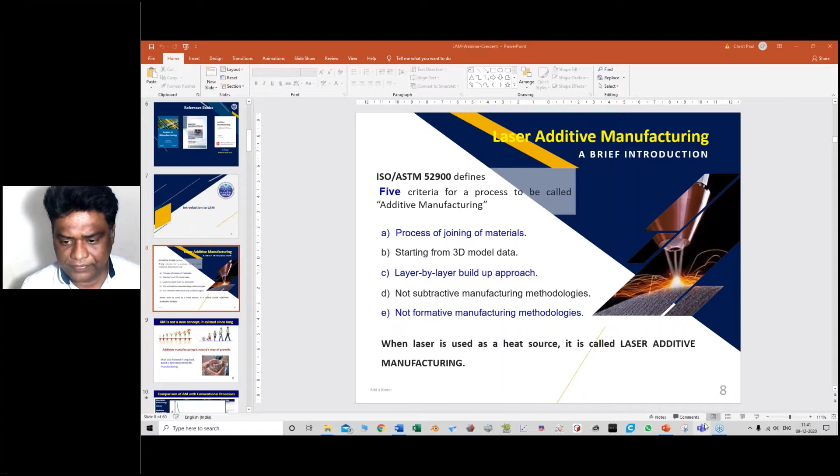This slide shows the 5 points defining the criteria for a process to be called additive manufacturing. So this is where we stopped. We have to understand these 5 criteria: process of joining material, starting with the 3D model, layer by layer, non-subtractive, non-formative.

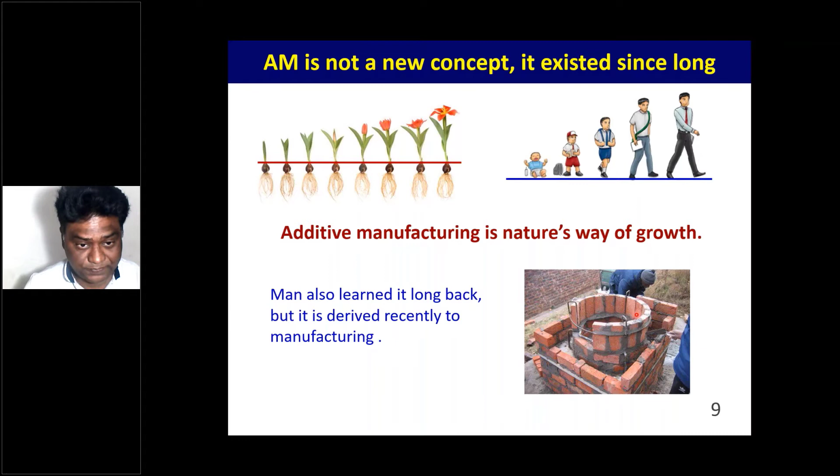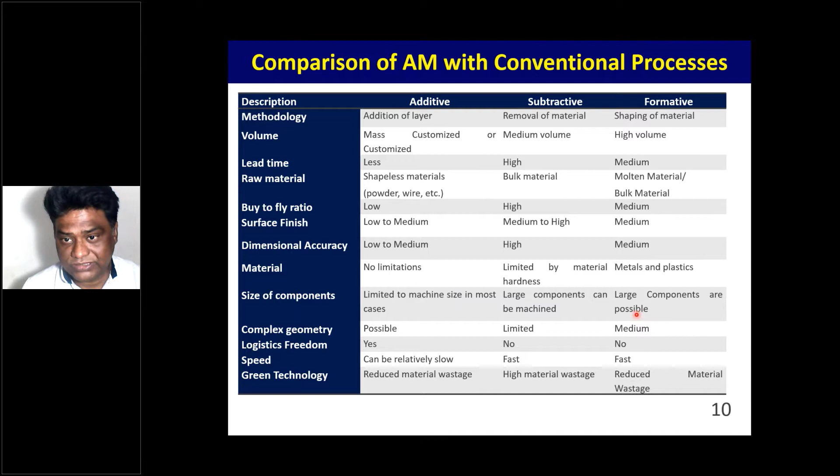Now let's have a quick comparison of additive manufacturing with subtractive and formative technology. In terms of dimensional accuracy, additive manufacturing gives low to medium, subtractive gives very high, and formative gives medium. So this is an area where additive manufacturing is not very attractive. The same goes for surface finish - these are areas where today additive manufacturing is not very attractive.

Now, if you see the material aspect, there is no limitation because we use lasers that can melt any material. So there's no limitation in additive manufacturing, whereas subtractive is limited by the hardness of the material, and formative is used only for metals and plastics - you can't form ceramics with it. So that is the limitation.

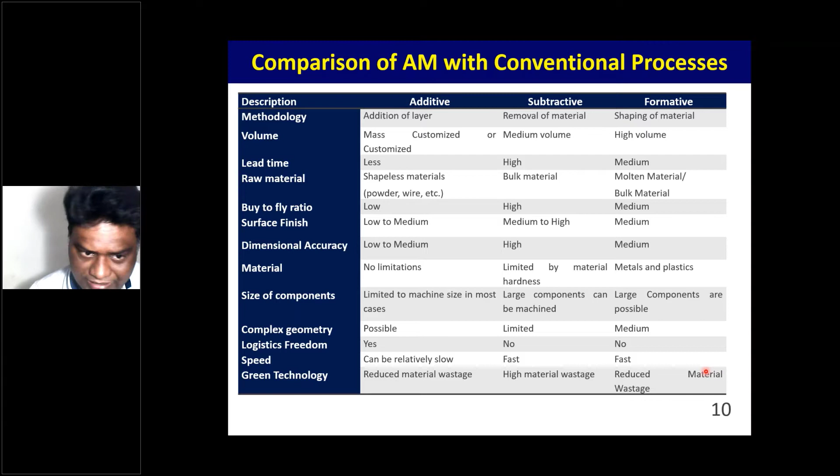So the major gain we get is in terms of material and shapes. The most important part is that it's a greener technology because it uses reduced material wastage, whereas subtractive has a lot of material wastage, and formative is another story. So these are the points where additive manufacturing, whether good or bad, is taking specific spaces.

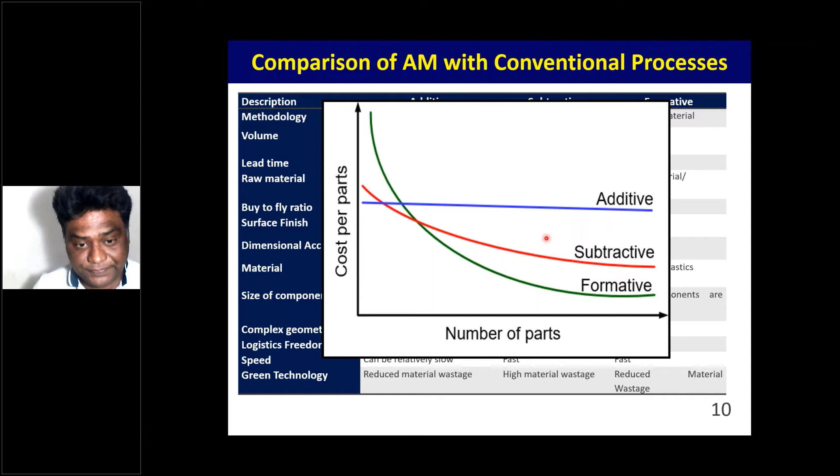So when I'm talking of additive manufacturing, I'm talking of laser additive manufacturing and saying this is great and big. Let's try to understand the commercial angle of it, how important these things are in terms of technological or techno-commercial aspects. Today industries are challenged in different ways. There is a cutthroat competition.

Let's take the example of cars. Some two decades back, we had only two manufacturers, Fiat and Ambassador, and nobody else. So though the market was smaller, the companies were assured about the business, and they knew that even if they were doing not very good, they could survive for long. On the other way, the customer was not very demanding. He thought this is part of it, and people used to live with it.

But what happened today? Talk of the car sector itself - we have many players: Honda, Hyundai, MG, Suzuki, so many players. So the market has gone up, it's increased, the volume has gone up. Even Indian manufacturers, Mahindra is there, now Kia is coming in, and we have Nissan too. Every manufacturer is catering to different segments by providing different models - hatchback, SUV, small cars, luxury cars. So everybody is giving everywhere.

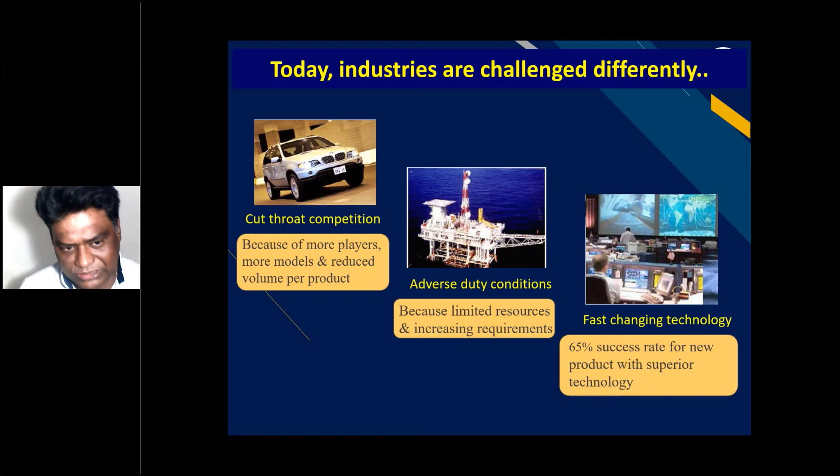Now let's try to understand. We talk so much about commerce, about industry requirements, about customer requirements. How does it affect, how does it help in terms of manufacturing? Let's see how conventional manufacturing works.

The conventional manufacturing normally starts with a design. So we have a synthesis part, analysis, then documentation and drawing. Then we plan the product, how to do it, whether it has to be sent for fabrication, to the welding shop, or machining centers. Shall we go for a lathe, a milling machine, or some forming tool?

So this planning has to be done. Then we procure the raw materials, then we procure the tools. We do the CNC programming in manufacturing, then we go for quality control, packing, and usage. So this is a typical cycle one can have for making a product.

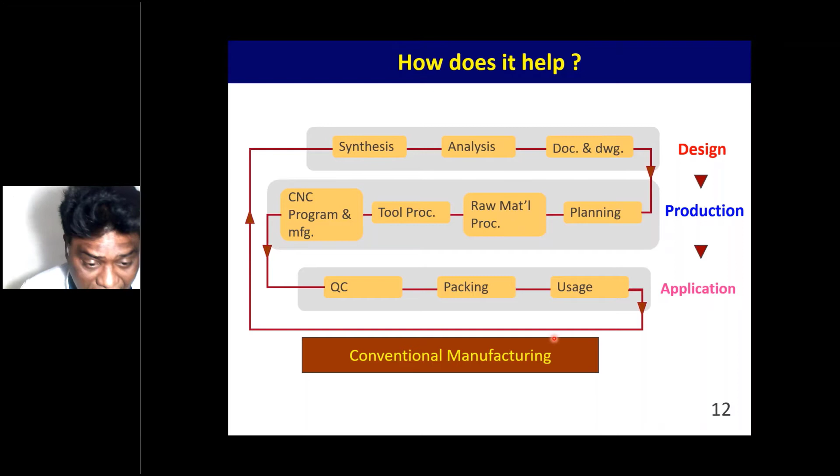With the advent of additive manufacturing, I can say these steps are not at all required. For example, documentation and drawing - now in additive manufacturing you start with the 3D model, so you don't need documentation and drawing. Whatever the model is, there are softwares that will convert that information the way they want. So we have a lot of saving, and even these steps may be required maybe 10% or 15%. The rest of the things are not required.

And in additive manufacturing, all the planning is on the machine, by softwares and computers. So no separate planning is required.

When talking of raw material procurement, the designer need not wait for completing the design to initiate the procurement procedure. For example, the purchase fellow, the moment you think you want to develop this component, he knows what will be the basic material since we are using shapeless material. So he knows what material we are going to have, and he will not wait for the design to be complete. As far as the volume of the product is within the range of the machine, you can go ahead and procure the materials immediately.

For example, you want to make a piston block. You know it will be of so grade of aluminum or so grade of cast iron. Right away you can procure the shapeless material and do it. If you do this for a conventional material, unless the product is finalized and the design is frozen, you cannot initiate procurement, because the size is the limitation.

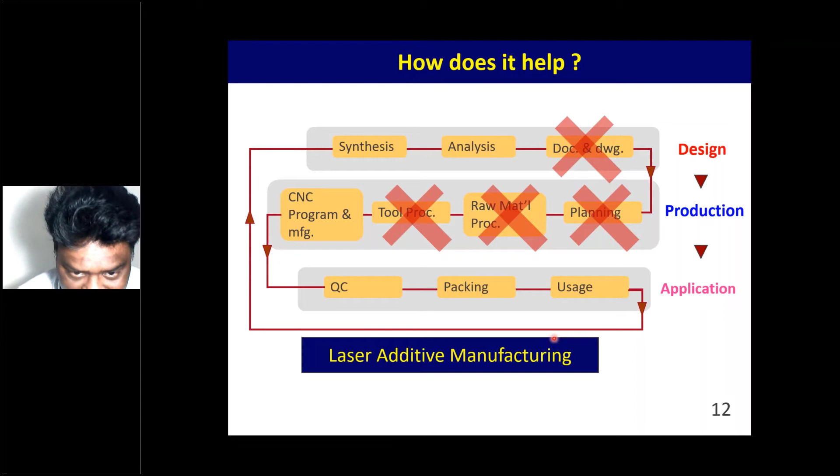In case of additive manufacturing, we don't need a specific tool because whatever is in the machine is done. Maybe for post-processing you may go for something to encounter today's limitations, but in general you don't need any tool procurement. So these are the things which make the scenario very much different.

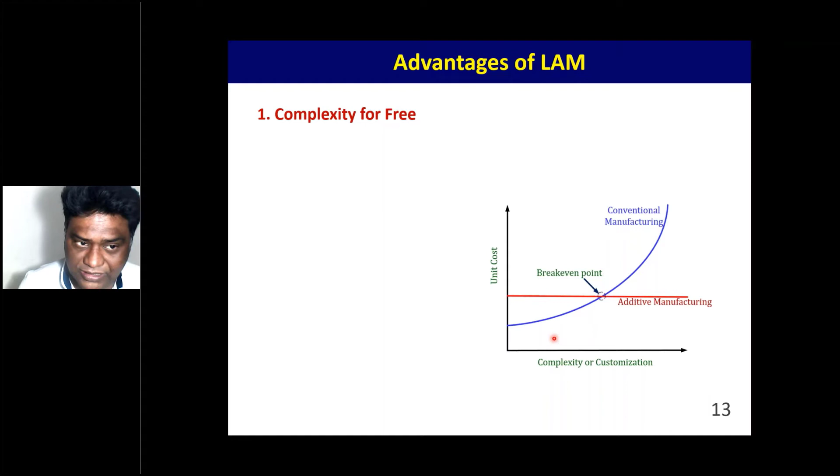So if we try to combine these technologies into the advantages of laser additive manufacturing: the first thing is it provides complexity for free, because whenever the 3D object is sliced into 2D, a lot of complexity is resolved. In terms of part fixturing, with laser additive manufacturing we are going with non-contact tools - there are no cutting forces, no forming loads, so things are simple.

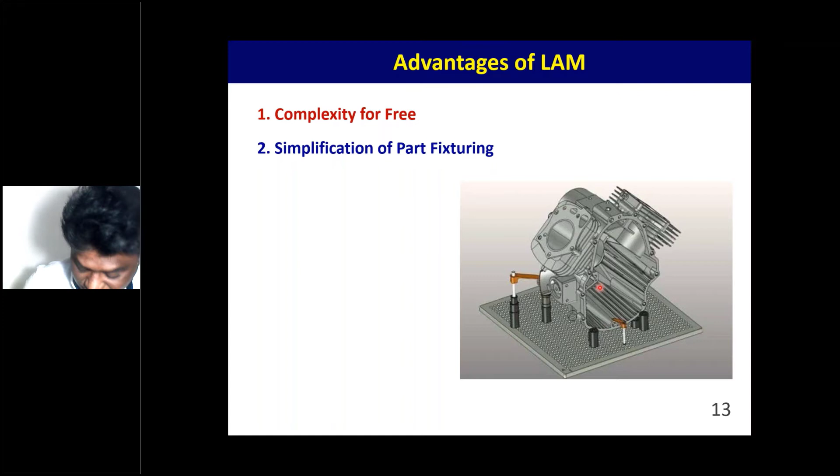Simplification is another advantage. You can go for mass customization - if somebody wants some specification at some other location, it's possible because you are making one by one.

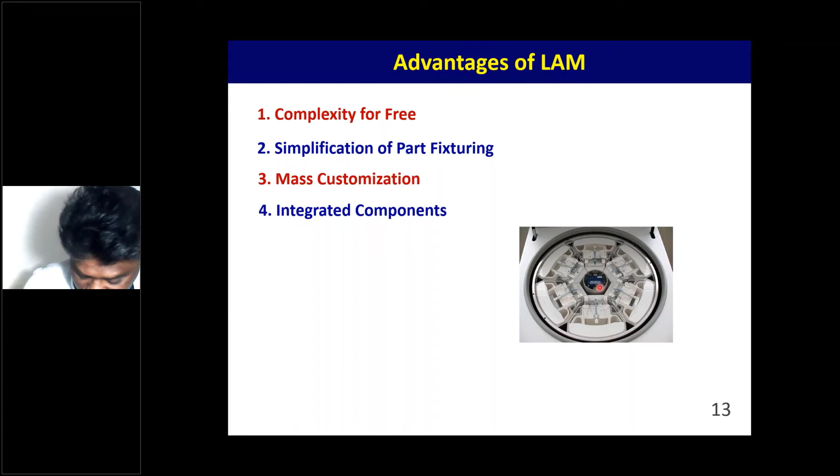Another aspect is you can think of integrating or embedding sensors within the component, which is not otherwise possible. For example, you can think of embedding cooling or thermocouples at different locations so you can have instant information of temperature at that location. You need not do a lot of things for that, and it can be embedded within the deposit itself.

Another aspect is material design freedom. With material design freedom, you can decide how you want to proceed ahead, how to decide feature-based design and manufacturing into it.

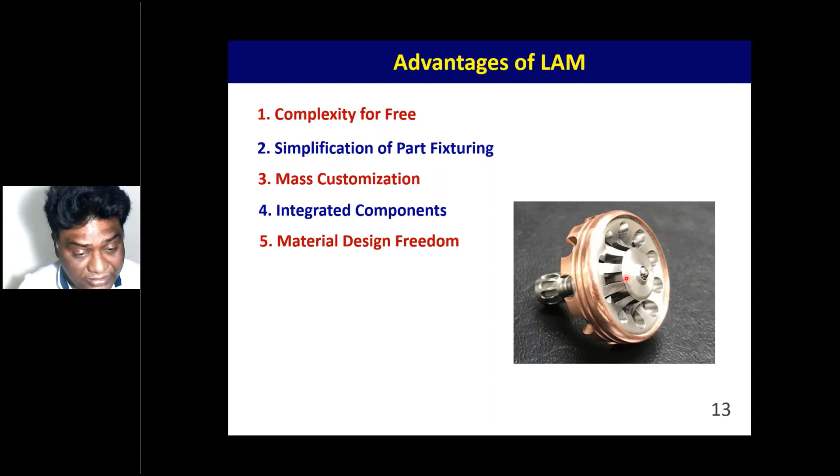When I talk about feature-based design and manufacturing, it means you want better conductivity, you can use copper. When you want strength, you can use stainless steel or any other structural material. So the idea is you can bring material design freedom in such a way that makes things very different, and you can plan. If you want a harder material or a variation material, you can deposit it locally, and the rest of the material can be other, which this freedom allows.

Another aspect is logistic freedom. Here, we have design freedom because this technology is Industry 4.0 compliant. So you can always send the design and take the help of experts. You can push things to different locations. So you need not worry about a lot of things, and there's a lot of logistic freedom available for people.

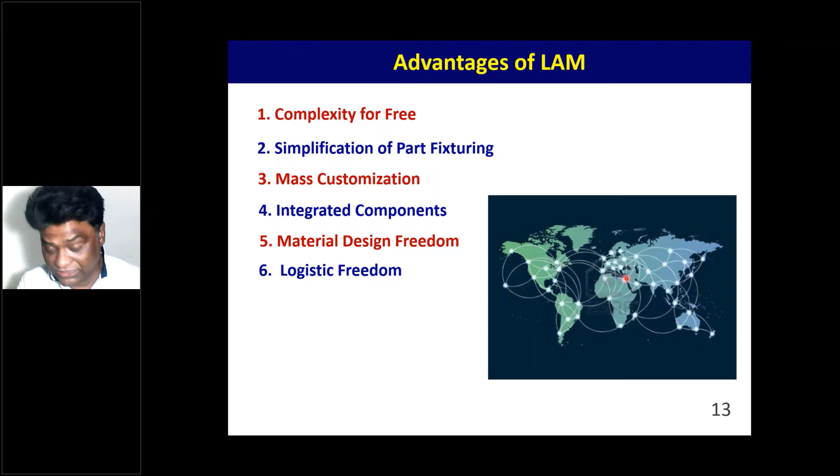Since you can put the parts together in a very nice way, there is a lot of saving, so basically it's also reduced time in terms of design, cost and cycle. That sort of arrangement is not possible to make using conventional manufacturing technology.

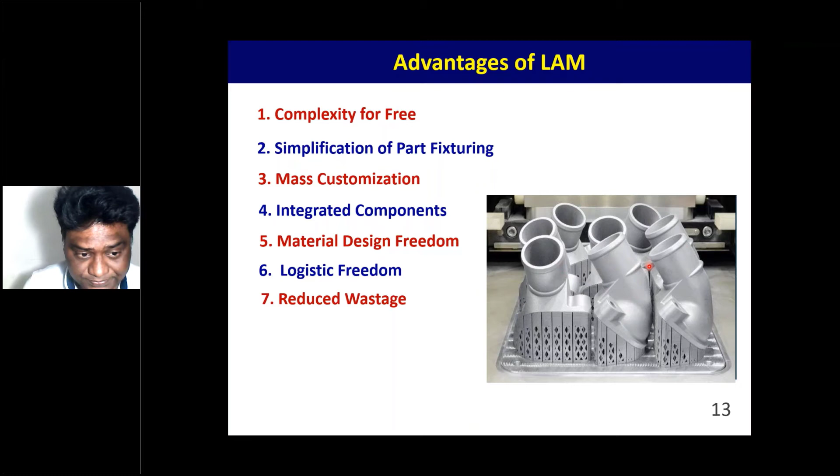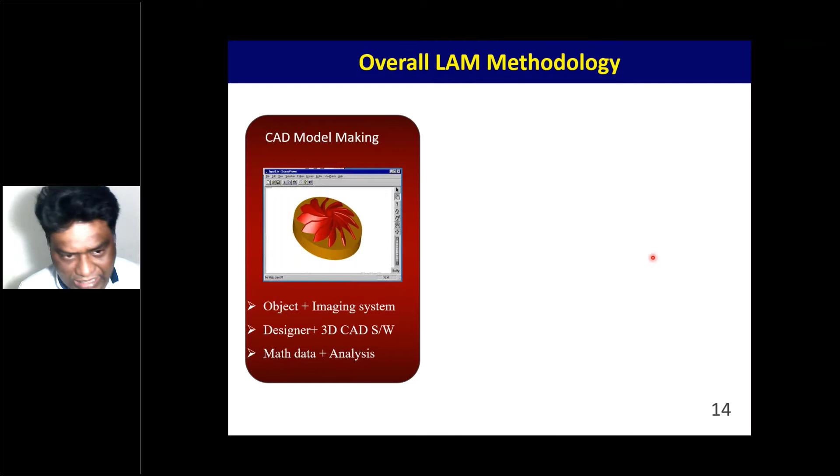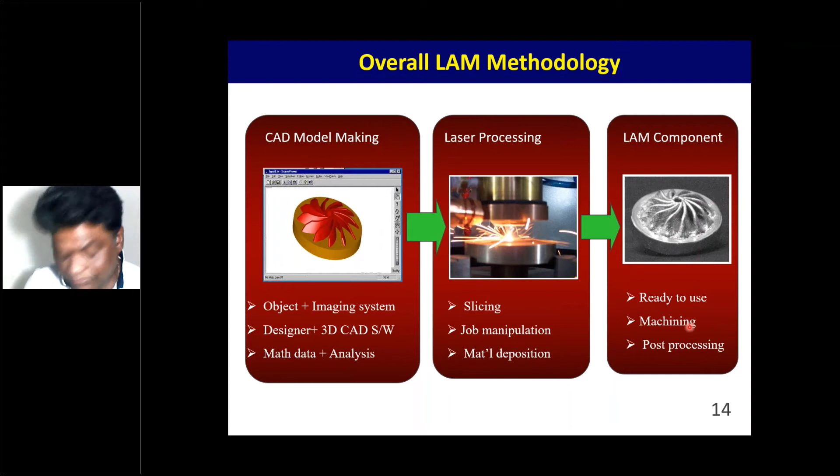Now we'll slice it, do the job manipulation, and do the layer by layer material deposition, and finally you may get this result output. So we are starting with this, doing a lot of things, and this is the output. This can be a ready-to-use material, or if the dimension requirement is not met, we may go for some machining. If the material requirement is not met, we can think of going for post processing. So this is the big picture about the LAM methodology.

Classification, I will not go into detail because some of you must already know. But again, we have to quickly understand there are two technologies: one is powder bed fusion, another is directed energy deposition. In powder bed fusion, you have sintering and melting, and here you have powder feeding and wire feeding. In powder feeding you feed the powder, and in wire feeding you feed the wire as a raw material during the deposition.

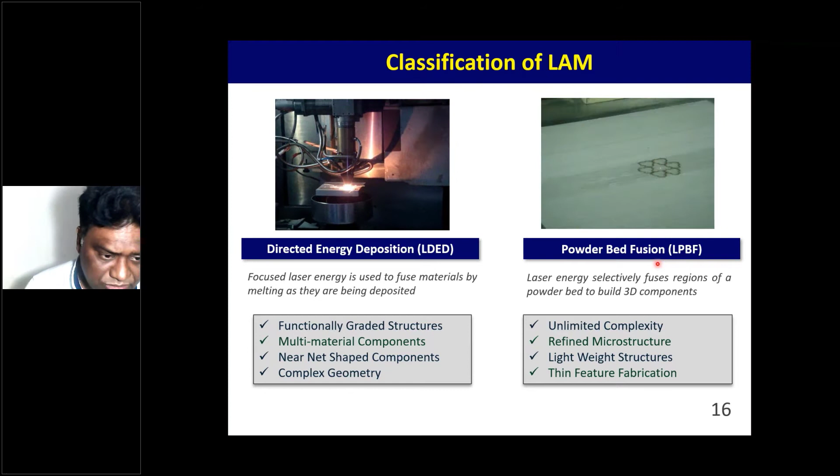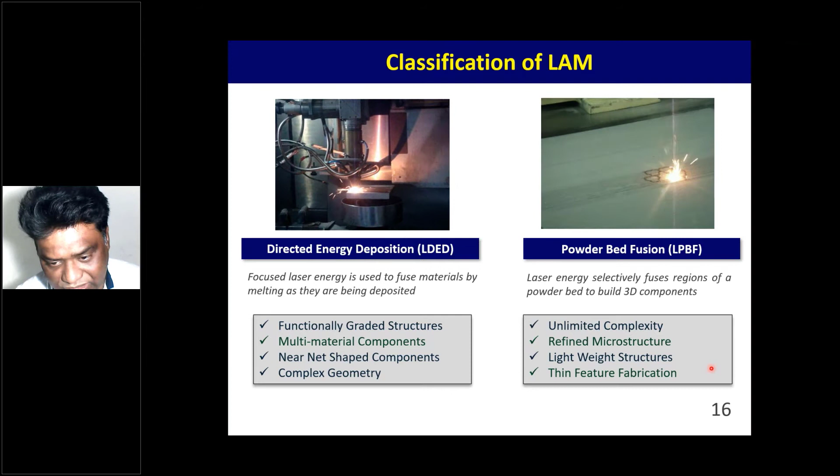This is about the classification, and you are seeing some small videos I have inserted in my slides, so that you can have a feel of what we have developed. These are our machines; we have developed both machines at RRCAT, the directed energy deposition machine as well as the powder bed fusion machine. The directed energy deposition machine can be used for making functionally graded materials and multi-material components. The shape can be near-net shape because dimensional accuracy is a bit of an issue here, but you can think of making complex structures and complex geometries. In the powder bed fusion machine, it's very good as far as complexity is concerned. The deposition rate and scanning rate are very high, resulting in refined microstructures. You can think of making lightweight structures or thin feature fabrication using powder bed fusion. So this is a quick comparison of the technologies we have developed and are working with.

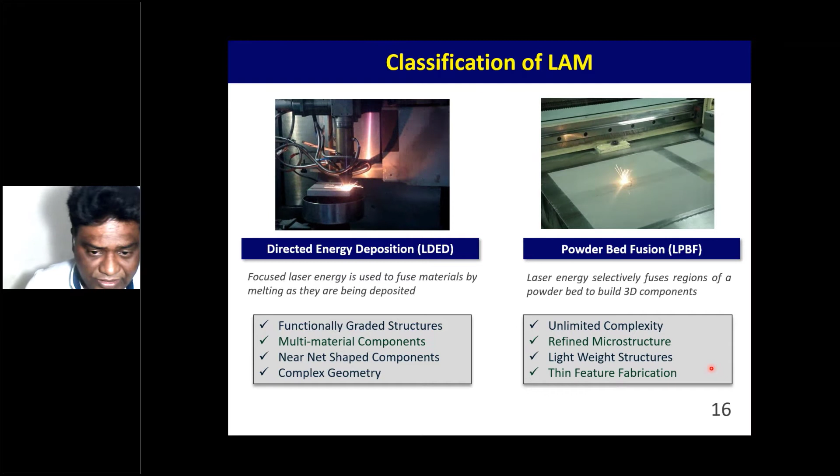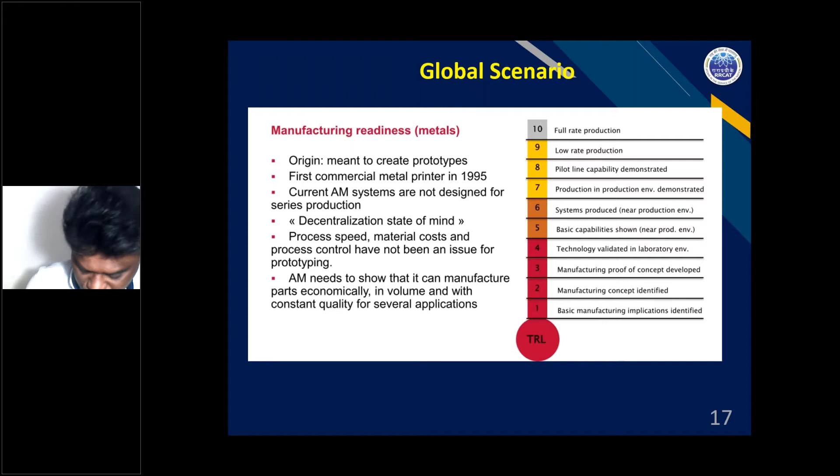Now the second point is the technology. There are two technologies, powder bed fusion and directed energy deposition. So what is the global scenario of this technology? Everywhere we talk of technology readiness level, which can be 1 to 10. This is the present status of technology in aviation and automobile, where we are somewhere at 5 to 6. In tooling, space, and drone defense, we are somewhere at 7, 8, 9. And in dental, instrumentation, implants, and artistic applications, we are already at 10. So this is the present status of laser manufacturing globally.

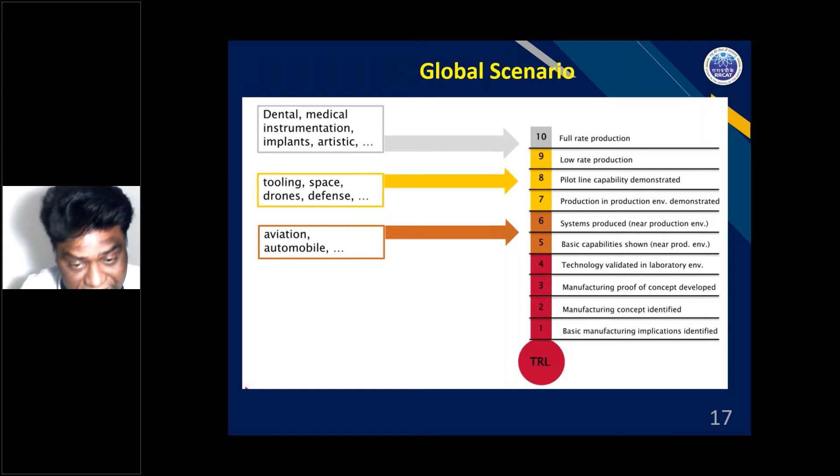Now, what is the condition in India? In India, industries are yet to take up metal additive manufacturing in a big way. Most people are focused on plastic additive manufacturing. There are some academic institutions now joining laser additive manufacturing in India. So this is the state of how things are going.

Now, the second question is, who has these machines in the country? Definitely, RRCAT Indore has indigenously developed machines.

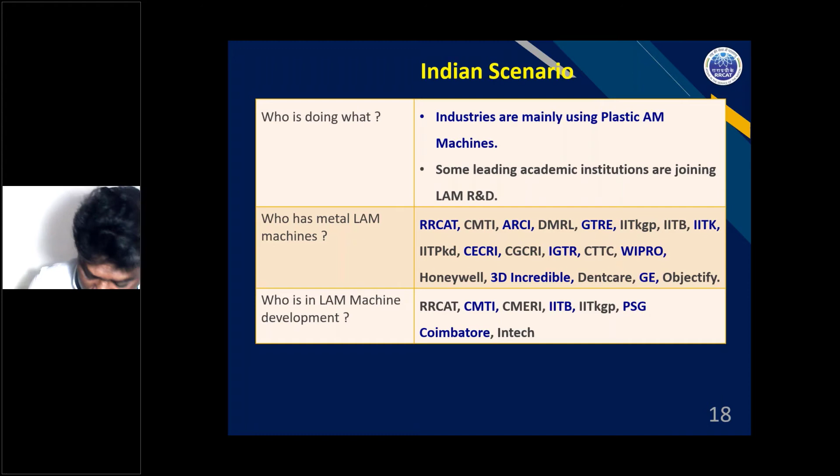Now another part is who are working in the development of machines. So we have a couple of labs and institutes like RRCAT, CMTI, CMERI, IIT Bombay, IIT Kharagpur, PSG College Coimbatore. They are working on the development of machines.

In fact, DMLS is also working in this area. So this was the Indian scenario, and now we'll push on to what we are doing at RRCAT. In RRCAT, we initiated this program somewhere in 2003 with my PhD, and then we moved ahead. Initially our systems were CO2 laser based, and we moved to fiber laser based machines. A lot of things have been done, and we'll be showing you some of the glimpses.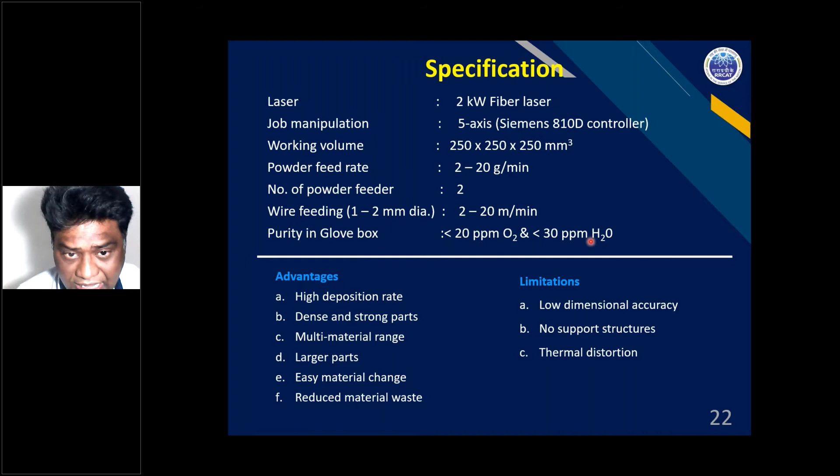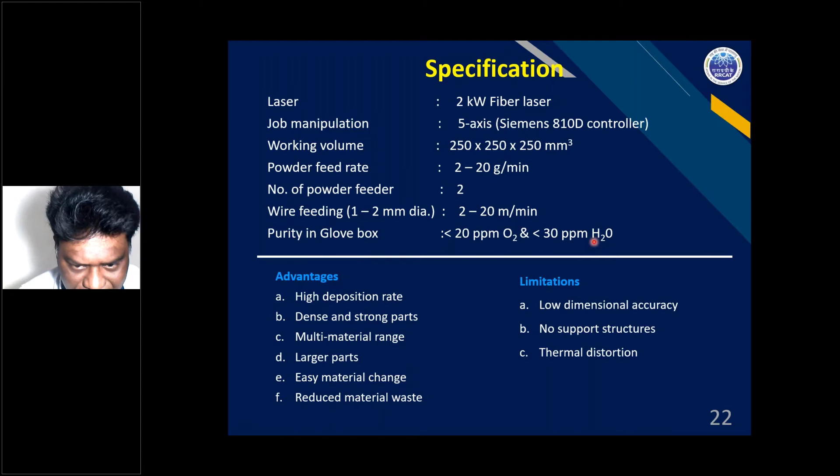The specification of this machine is you can go for 2 to 20 grams per minute of deposition. wire feed can be 2 to 20 meters per minute. This has a build volume of 250 by 250 by 250. Any metals can be tried out because we have a very nice glove box, which can give us oxygen level better than 20 ppm and moisture level better than 30 ppm. So this is the machine.

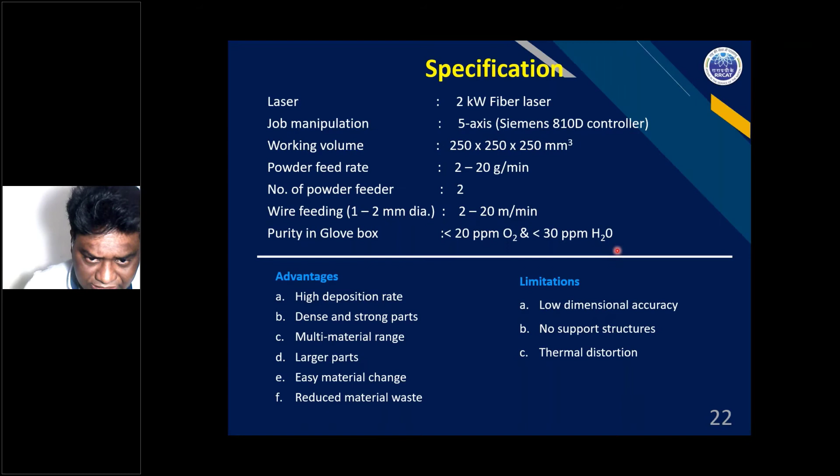Another machine that we built is the powder bed fusion machine. One thing I'll mention before I go to the second machine: if we compare this machine to the commercially built machine, the commercial machine will cost in the range of 5 to 7.5 crores. The projected cost of our machine is somewhere around 2 to 2.5 crores. So what I'm saying is, they're likely to have a 2 to 3 times saving in terms of import substitution. So this is the machine we built.

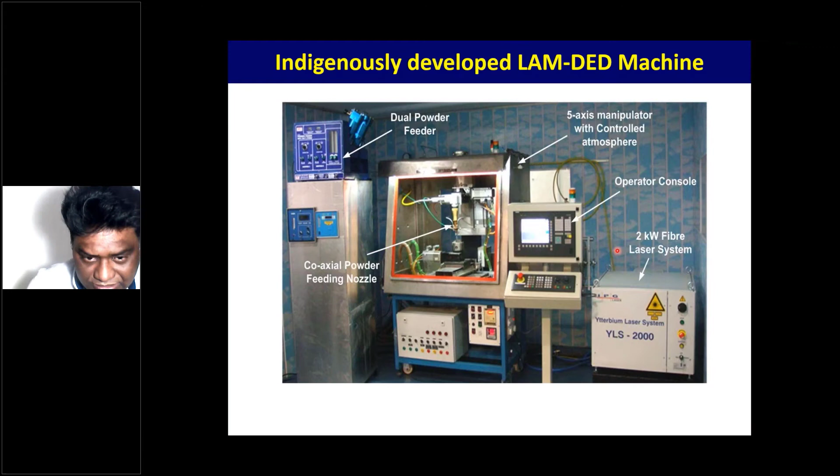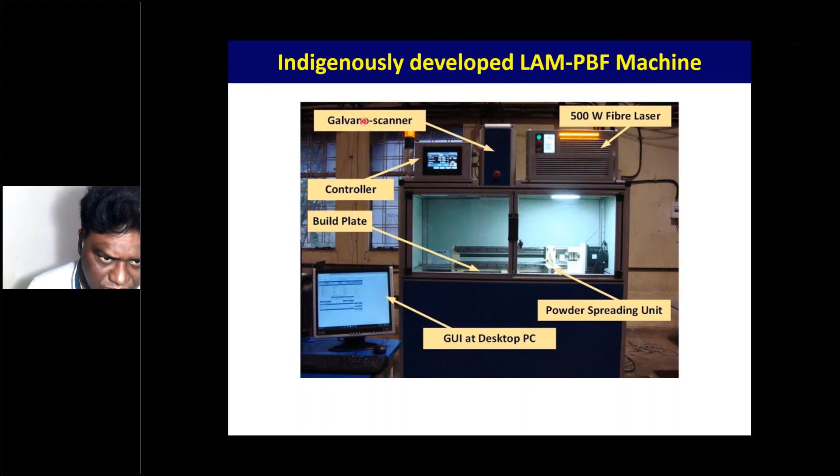The other machine we developed is a 500 watt fiber laser based powder bed fusion machine. In this machine we are using a 500 watt fiber laser. You have a powder spreader, controller, galvano scanner, and build plate. All these things are done, and this particular machine also has a build volume of 250 by 250 by 250 millimeters. We are doing a lot of things with these two machines.

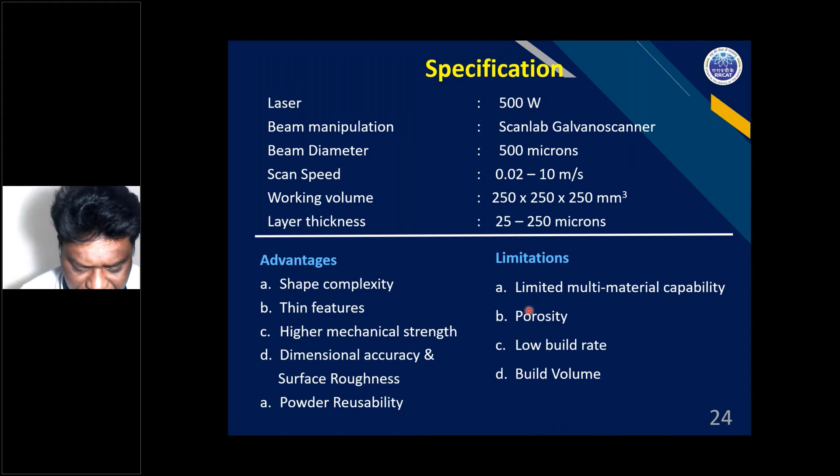The commercial cost of this machine may be somewhere around 3.5 to 5 crores. The machine that we built may cost somewhere about 90 lakhs to 1.5 crores. So this is again a different ball game and different program that we have come up with, trying to push things to the next level of excellence.

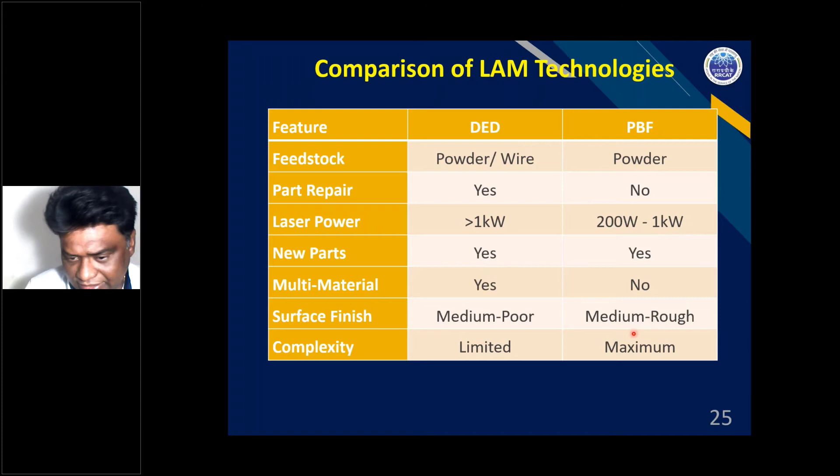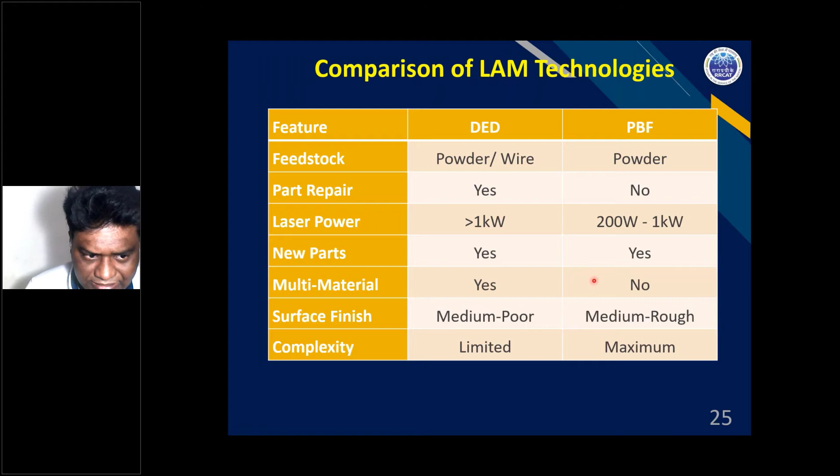Now, if you compare these two technologies, direct energy deposition and powder bed fusion, you'll find that direct energy deposition is very good when it comes to part repair, and when it comes to making multi-material parts, it takes the lead compared to powder bed fusion. But when it comes to handling the most complex components, powder bed fusion comes out better, and in terms of surface finish, it scores well. So these are the quick comparisons of these two technologies.

What are the processes we are doing at RRCAT? Another thing I'm going to share with you. Before we go into that, I'll try to share how the technologies are assimilated by the people working with us, and what our observations are on how things have changed.

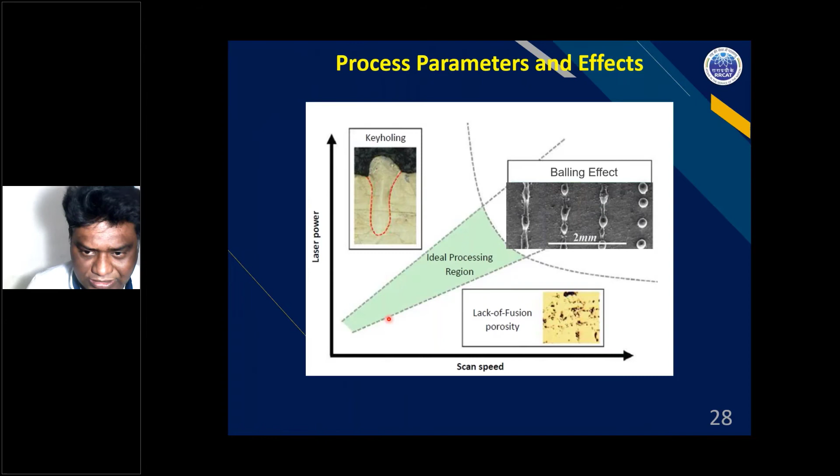So what I want to say is, just to demonstrate, it's a very simple concept to make a porous structure. Either you can use such balls, or you can make curvatures like this. As a result, you can make the porous structure, which is not possible conventionally to generate such things.

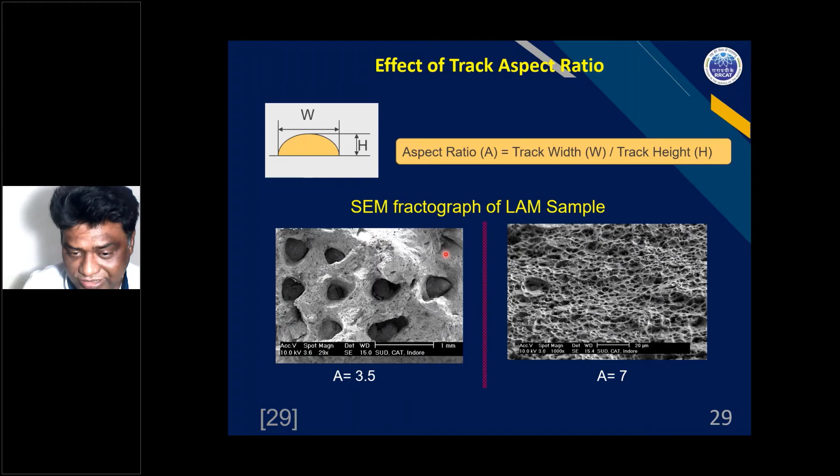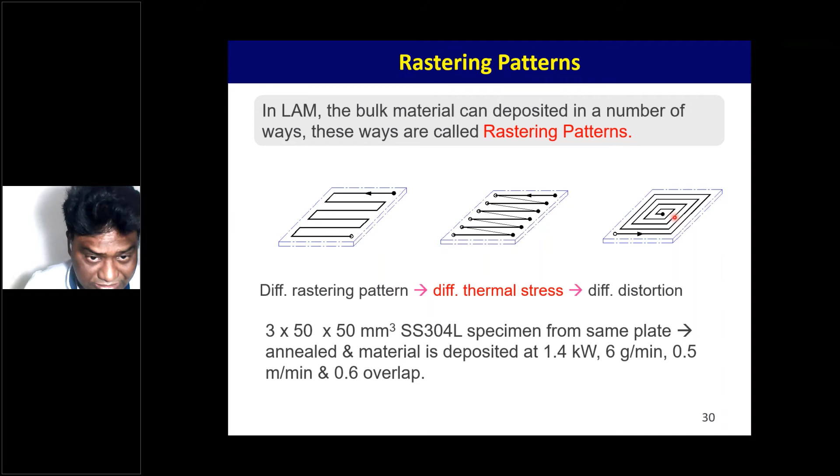Now, when you have to make a component of larger size, suppose you want to make a cubical structure, you want to fill a square at every point, so you can have a number of ways of filling this. What you have to understand, in case of metals, these scanning and rastering patterns are going to give a different thermal stress and different distortion. So this is important, and we have studied the 4 patterns and tried to understand how these are changing the scenario in terms of distortion.

So this is the S pattern, because it forms the S continuously. Laser is switching on, going this way, then going this way, and then doing this. Another we have is the Z pattern, where you are going from here, switching off the laser, coming back, and then starting again. That is Z pattern. And you can also think of filling the area with a spiral in or spiral out. All these 4 will give different shapes.

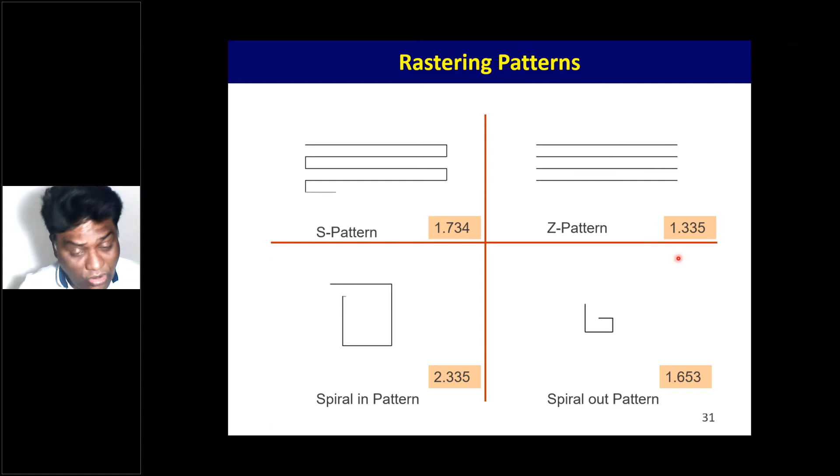You see, this is the way it works for the S pattern. This is the way it works for the Z pattern. This is the way it works for spiral in, and this is for spiral out.

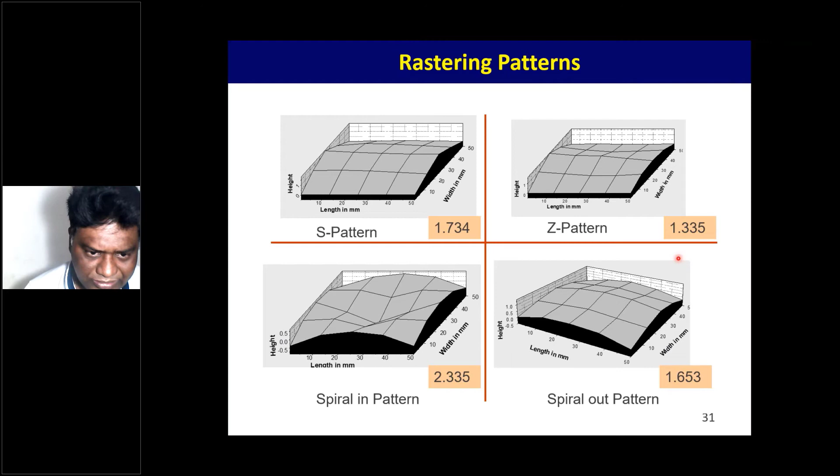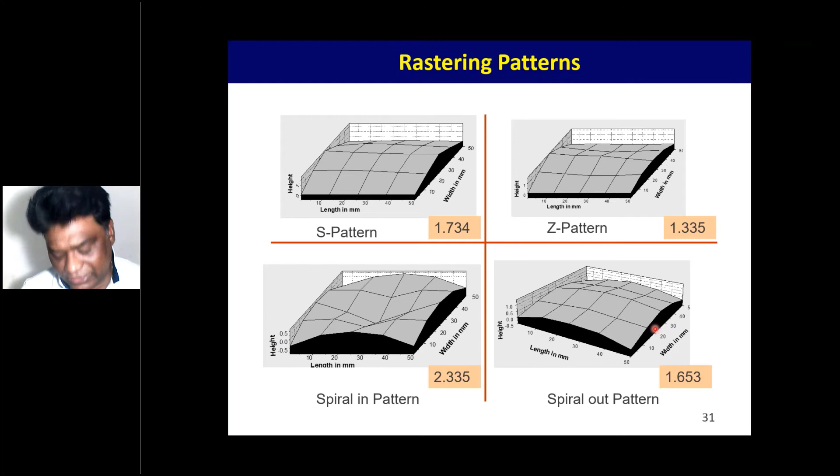Another way of resolving this problem can be, you can do the meandering. You can just move like this, and every layer can be rotated by 67 degrees. First layer you are depositing, then turning it to 67 and depositing another layer like this. Similarly, you can think of making stripes to cover larger areas so that the preheating effect can be managed.

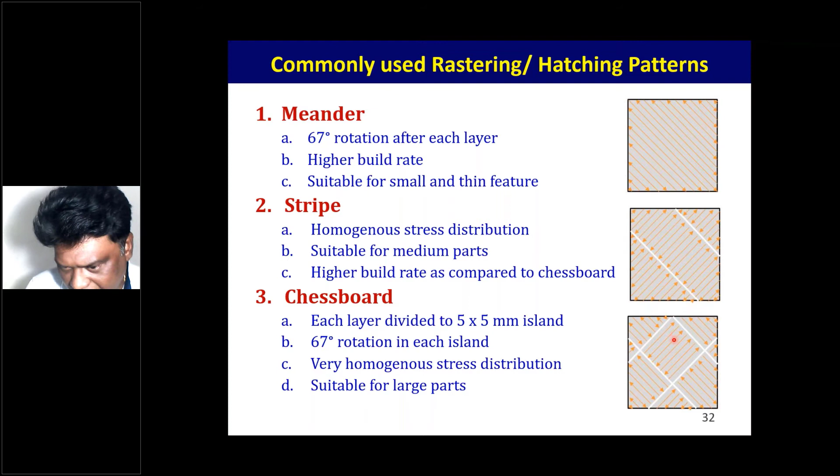Another way, you can have a chessboard. You can make 5 mm by 5 mm islands, and then just go on depositing the material across this. After every layer, the next layer will be rotated. Everything like this square will be rotated by 67 degrees. So that sort of thing people try, and 67 is really a magic number. That works wonderfully for many applications to control the residual stress, to bring things in a very big way.

When we talk of these, we have a lot of things to consider as a design consideration. We talk about the feature size, surface finish, part orientation, lateral holes, overhang structure, and residual stresses.

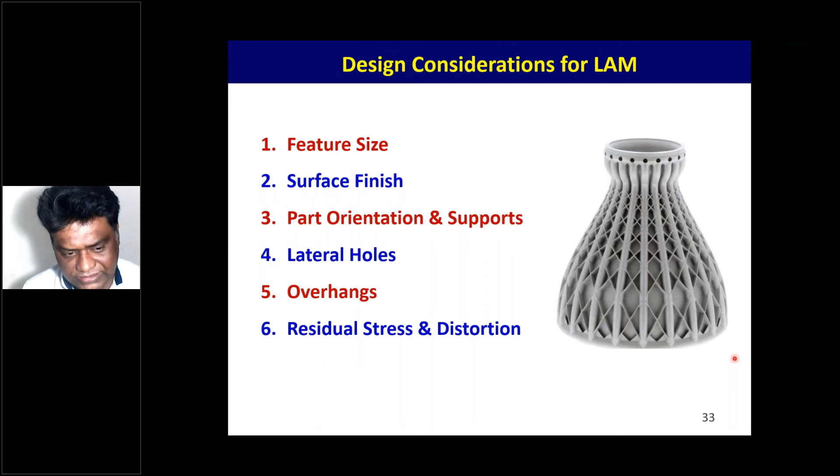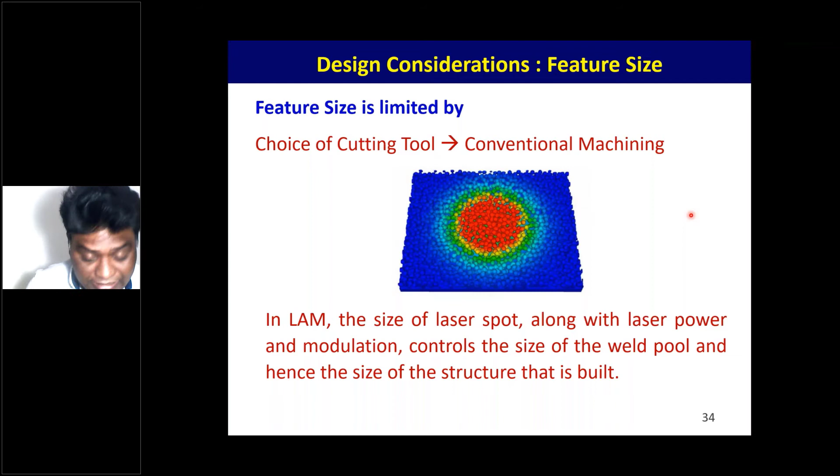So when we talk about the feature size in laser manufacturing, the diameter of the laser spot is almost like a tool in cutting conventional manufacturing. Suppose you want to drill a hole of 2 mm, your drill diameter has to be smaller or equal to 2 millimeters. Something similar applies here. If you want a certain feature size, you should have a smaller diameter. But whenever you have a smaller diameter, though you can achieve a very good feature size, fabrication time goes very high because they are depositing very small area and small volume.

There are other parameters which play a greater role in achieving better surface finish: laser power and modulation, the powder particle size being used, and the layer thickness. Typical surface finish people get is in the range of 5 to 10 micron RA value.

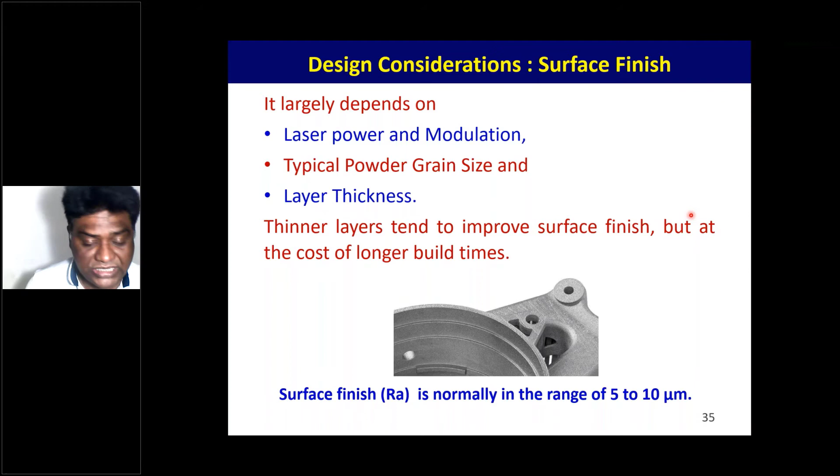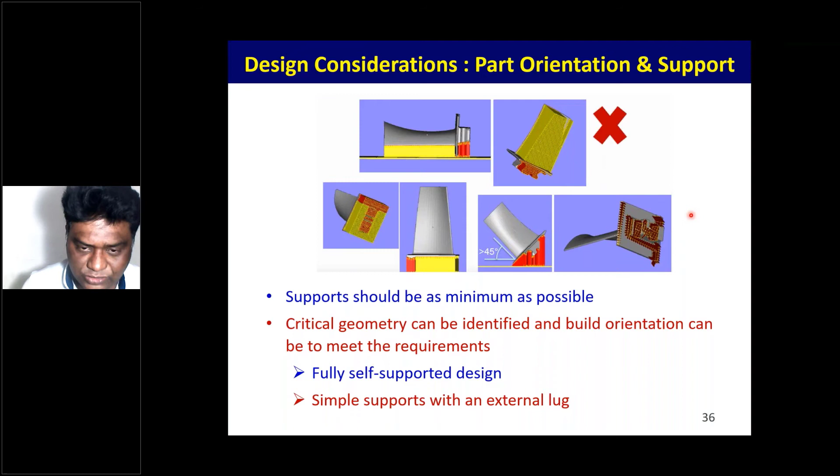You can make the component in different orientations, and all these orientations give different building times because there will be different needs for supporting structures. So we have to figure out which orientation will be best. The emphasis is always that support structures should be minimum, because whenever there are support structures, you have to work to remove the material and do post-processing. Therefore, we should try to build the whole component in a self-supported design. So orientation should be made in such a way, and that is the key manufacturing aspect.

If you have a lateral hole in the component when you deposit, and if it's small, maybe 0.4 millimeter or 6 millimeter, you are okay. The moment you cross 10 millimeters, you need some supporting structure, and this creates a problem of how to clean it up. This is a matter which needs to be understood and worked on. But at 10 millimeter and more, you need to give a support structure, otherwise it won't work the same.

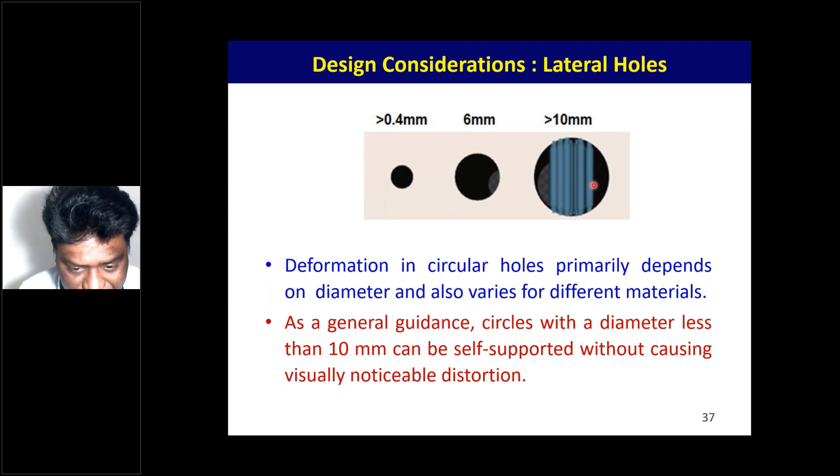If you have overhang structures, what we have to understand is the physics: if there is solid material and you deposit another layer, there would be very good heat flow. But if it's an overhang structure, there will be nothing there. Therefore, the heat flow pattern will be different, and this leads to different properties and geometrical distortion. As a thumb rule, 30 degrees to vertical is preferable, and if not, you have to use some support structure so the geometry integrity is ensured. People also try to make support structures for providing a chilling effect, to push away all possible heat. That sort of thing people do, and many of these approaches are right.

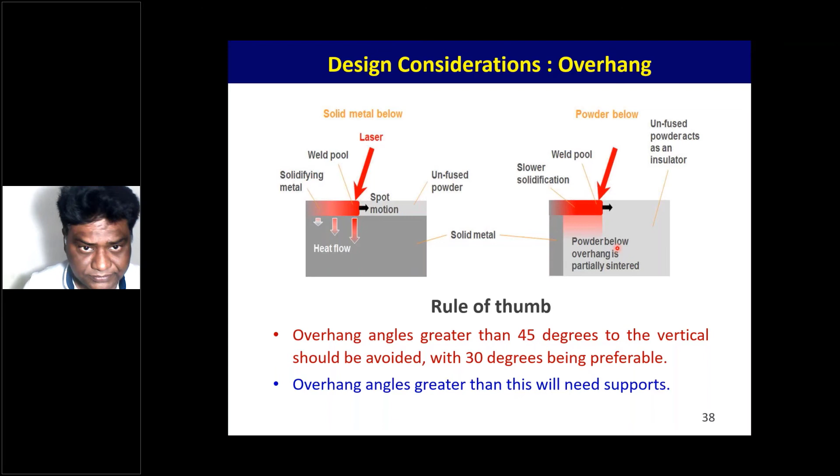Another aspect is that when you process, you are melting the material. When the metal melts, it spreads, and in the melt there is no stress. Normally when you heat material, it expands and there would be some stresses, but the moment it becomes liquid, there is no stress - all stress is reduced. But what happens when you cool it? Again you have contraction, and this results in residual stresses. So these are things we need to work on. What we have to understand is that at any point of time, if local residual stress is more than the ultimate strength of the material, the material is likely to fail. So we have to work on managing the residual stress during fabrication.

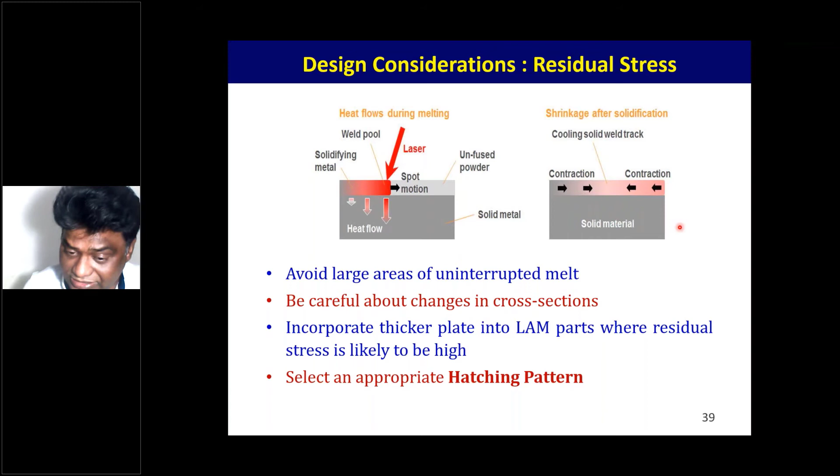Now I'll go to the next level of work - what we have done recently at RRCAT. We are working with a large number of institutes, R&D, national labs, and academic institutes. Our emphasis is to provide and support different institutes so that a better R&D environment can be created, and a very nice ecosystem where people can work.

So what are we doing? We are extending our facilities. People from BARC, IGCAR are working with our department. We are working with the Institute of Plasma Research, with ARCI Hyderabad, Vikram Sarabhai Space Center Trivandrum. Besides this, we are working with IIT Indore, IIT Roorkee, IIT Bombay, and IIT Guwahati.

Then we have IIT Kanpur, IIT Palakkad, and so many others. In NIT we have NIT Warangal, NIT Surat. So there are so many institutions working with us, including IIIT Kanchipuram.

After that, the samples can be taken back and people do the characterization. If some small and initial experiment has to be done, that characterization can also be done, or we can extend the facility. That sort of collaboration is going on across institutes, and we are having 25 plus journal papers every year published from our group. Things are moving in a bigger, stronger way.

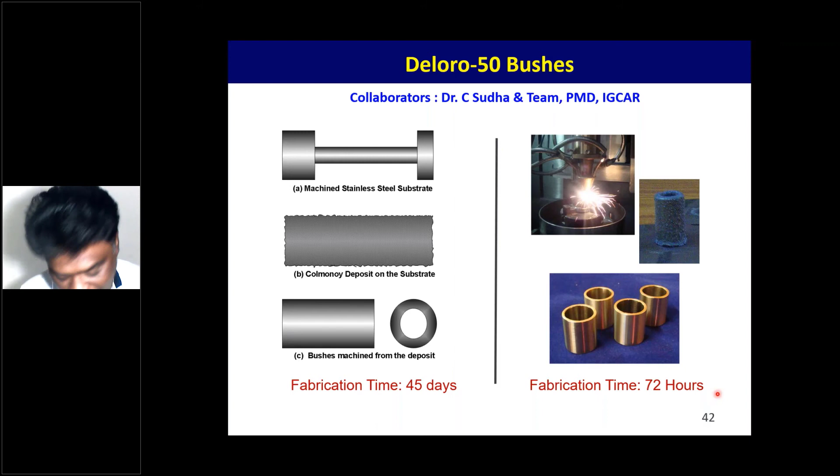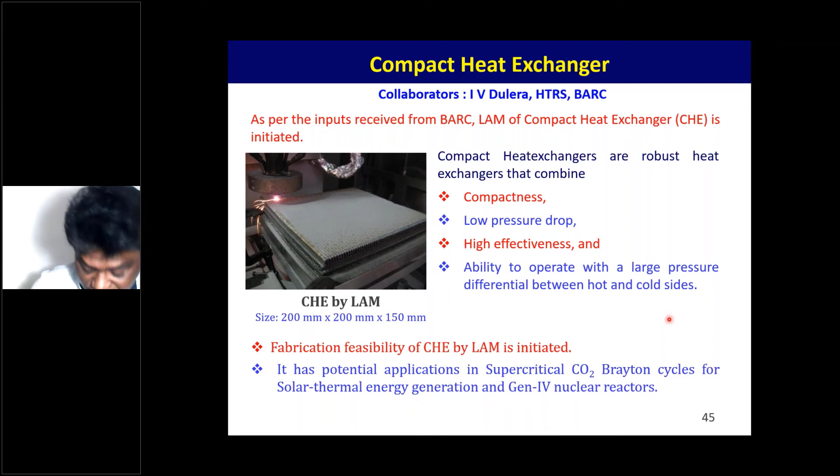You have to understand there is almost an order of magnitude difference in the cost when we use laser manufacturing. The way 80 lakh worth of things we were getting made from UK used acid etching followed by diffusion bonding. That process was changed to laser manufacturing, and a lot of money was saved for the country.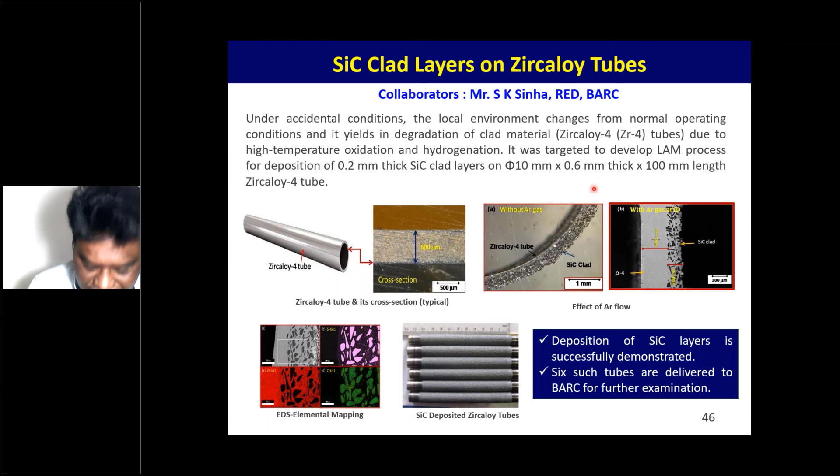Another thing we did was silicon carbide layer deposition for zircaloy. This, again post-Fukushima, is to safeguard our reactors, so a lot of research is being done as part of this. Here I'd like to highlight tubes of 10 millimeter diameter, 0.6 millimeter thick, and 100 millimeter, where we want a deposition of 0.2 millimeter silicon carbide on the zircaloy. That sort of thing has been done successfully, and we have already given these tubes to BARC for testing.

For in-house requirements, we also developed copper deposition. We understood how copper can benefit and give us an advantage, and we saw a lot of advantage happen. In copper we could achieve uniform cellular microstructures, so the strength and other properties are very much benefited.

This is another work we did in collaboration with NIT Warangal with SS316. We put in some tungsten carbide, and the properties improved and shapes improved also.

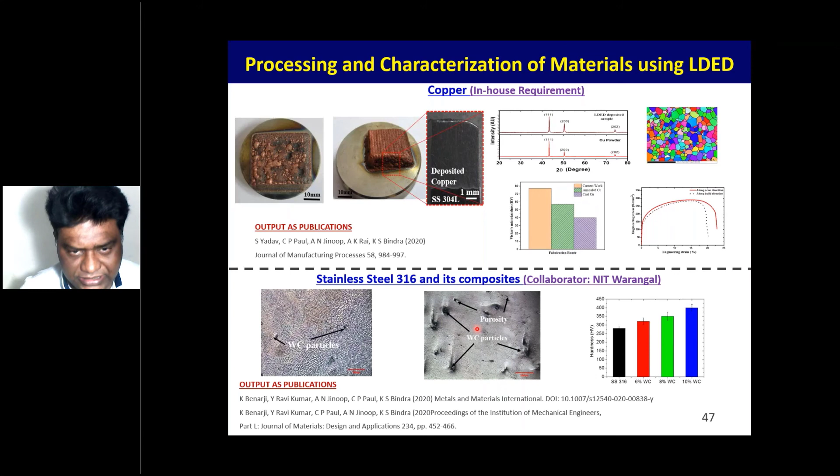These are other aspects we did using our DED machine. One application was to deposit a molybdenum layer at the front of the copper. This is particularly for the Institute of Plasma Research, Gandhinagar, as part of the ITER project. ITER means International Thermonuclear Experimental Reactor, which is being built in France. So we tried to develop this technology.

So we have copper—this is basically not exactly copper, it is copper-chromium-zirconium, a special alloy. After that we used a nickel interface, and then went to the moly. A lot of work was done fairly well, and it is almost developed, and now we are moving on to building the component.

Another application, working with IGCAR, is making graded structures of Delero-50 and stainless steel. A lot of success stories and things have been done.

When we talk of dissimilar materials and very complex shapes with tight tolerances, we are winning the race by defining appropriate strategies, and this is bringing a paradigm shift to manufacturing.

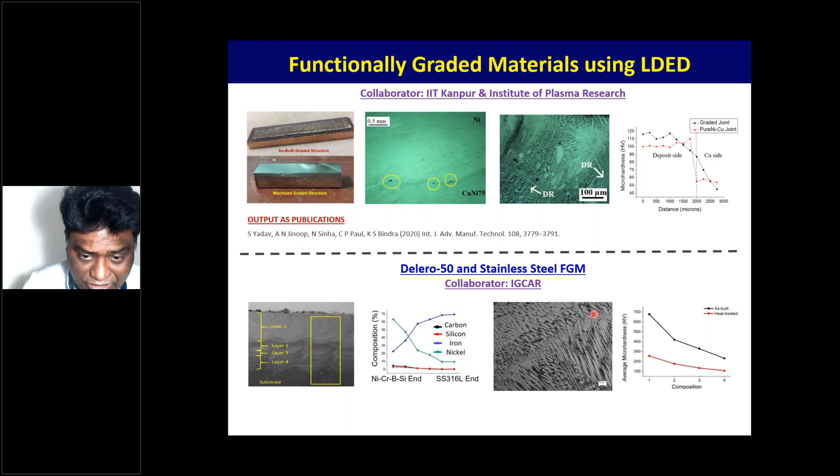Another great example is making graded porous structures. Can you think of making a porous structure that starts with 0% porosity and moves on to 60% porosity? These things have been done. You see beautiful work done at RRCAT depositing this, and these are the microscopy images showing the porosity built and demonstrated in space.

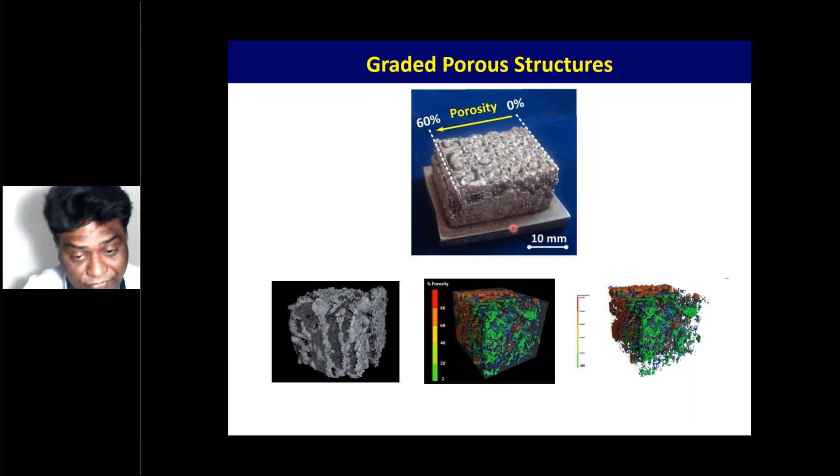What I want to show is we had been taught that porosity is bad in an engineering component. It's true, it is bad. But in the past we were very much afraid of it as human beings, because we didn't have a control strategy on this. If you make a porous structure in a predefined way with very good control on the location and size of the porosity, it can be exploited in a better way. So making porous, light structures and using them differently is again a paradigm shift in manufacturing and utilizing material effectively for different applications.

So these are the shapes of some components that we built. After this, I'll move to the next part: the technological challenges.

We talk about the limitations of laser additive manufacturing. The production cost is very high, the machines are very costly, and everything is under patent, so you have to find some way around it. There are issues which need to be covered and controlled.

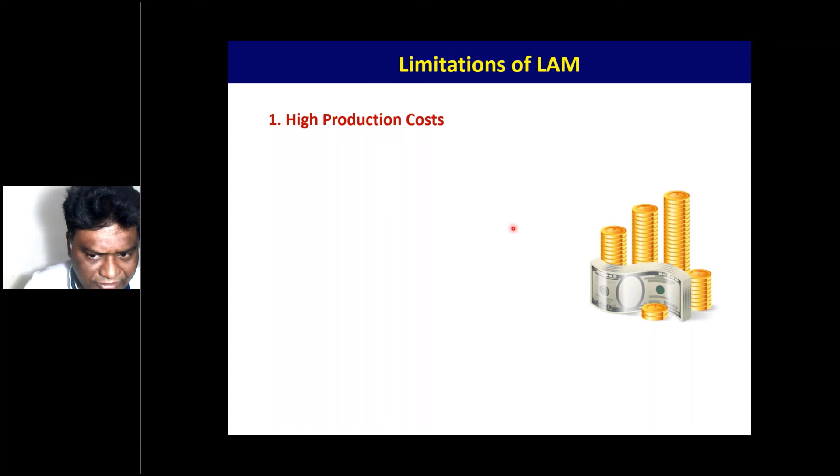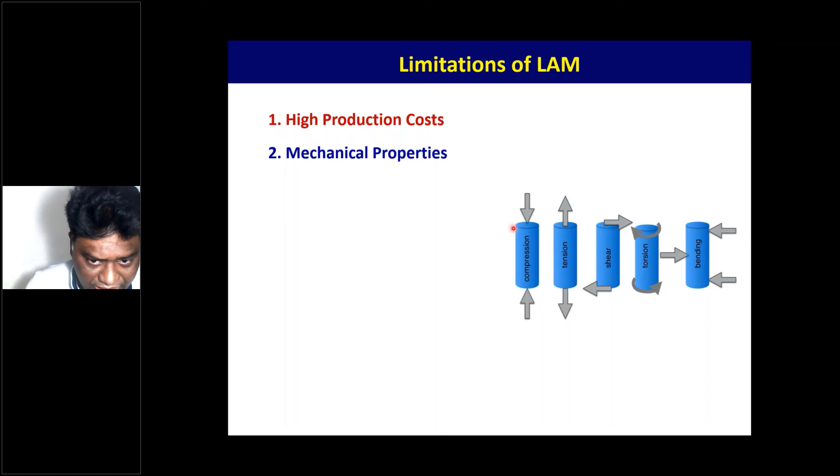What are the materials we are building? We are challenged to show equal and better properties for the desired applications. A lot of work remains to be done; there are limitations on this aspect, and people are trying to come up with training strategies to work on it. Another limitation is that the microstructures are different because we are going for layer by layer deposition.

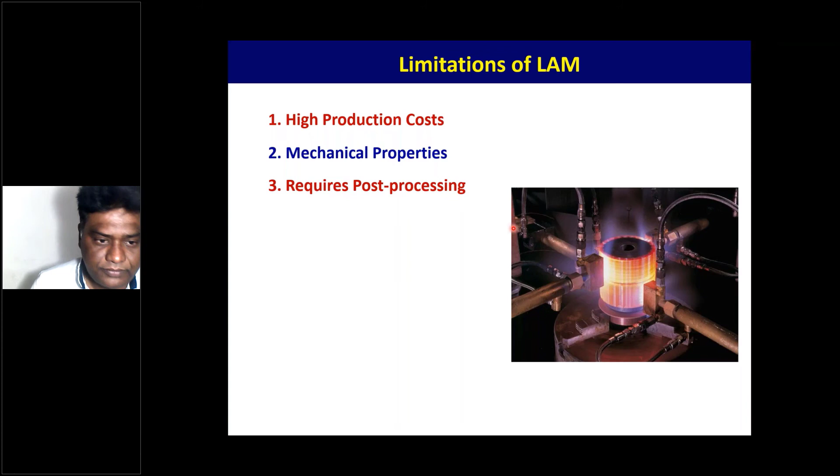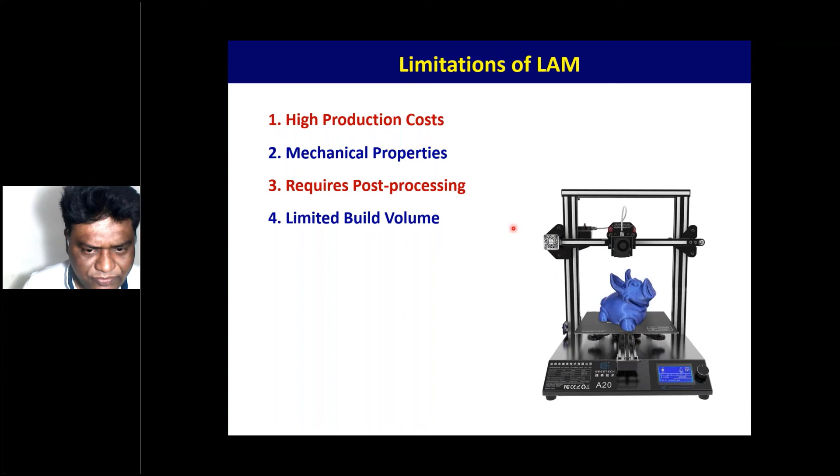You can go for the post processing of these things, so we need to go for that—again a limitation. Another aspect is the build volume is now 250 by 250. People are trying to build bigger and larger machines, but still today that is the limitation. Stepping effect—many people might have told you about this. I won't go into it, but again, this is one of the major limitations.

Now let me look at the opportunities for people working in the area of laser additive manufacturing. The full domain is open for us to work on, from machine and software development to process development and control, materials and feedstock development, making the rules for laser additive manufacturing, modeling and simulations, characterization and testing techniques, quality control and assurance, application development, and more importantly, education and training. So the whole domain is available to us as an opportunity.

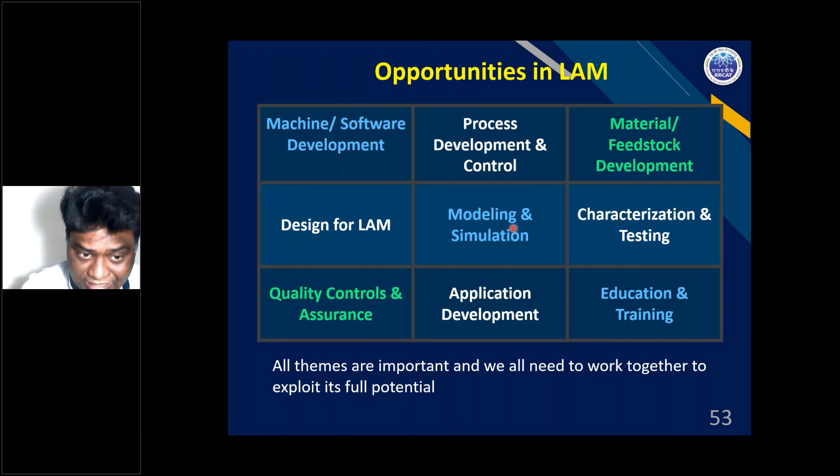Let's see each domain one by one. When we talk of machine and software development, there is huge investment involved, and we have limited resources. What we have to do is come up with more innovative ideas so that the cost can be brought down, patent and IP limitations can be taken care of, and we can come up with better machines. So that is one of the opportunities for us to push on.

Second, a lot of things are being done, but there are many issues—sometimes with the repeatability of the process and so on. So we have a lot of opportunity here. People are working on this area, on how to have a robust process and a very good control system. That is the opportunity for us to work on, especially generating reproducible outcomes.

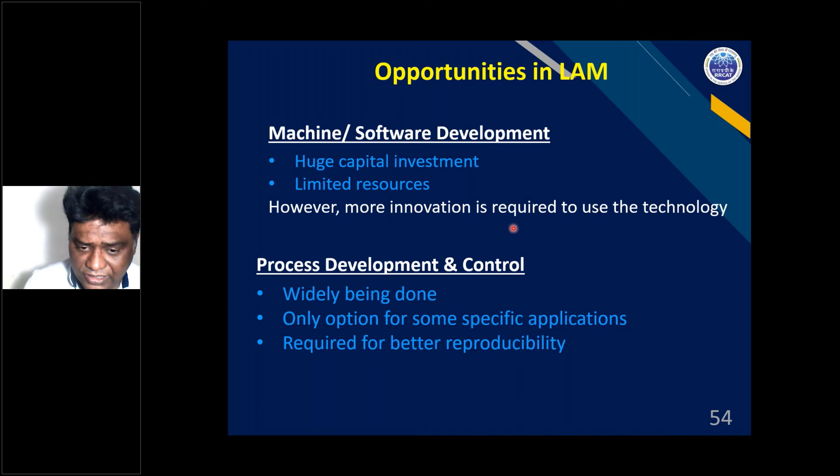Whatever materials we are using are basically outcomes of conventional manufacturing. So people need to think of developing special alloys for these applications—for example, finer tweaking of compositions, or better alloys which may perform better as a result of additive manufacturing for specific applications. So there is scope to develop these materials and work on them.

What I want to say is, when you talk of AM, the material use is very less. You can always have pre-mixed metal powders, do the deposition, and maybe 10 or 15 grams of material can be used to build stuff for the initial experiment, and later you can go to hundreds of grams. So a lot of feedstock material can be developed and tried out—there's opportunity for people to work on this.

As far as design rules for laser additive manufacturing are concerned, it's not a replacement for conventional manufacturing. There is a need to unlearn conventional manufacturing methodologies and think comprehensively about how to design a product so we can leverage the maximum advantage of the technology. That is a challenge, and a lot of work has to happen. People have to come up with design rules and thumb rules. What I'm saying is, today, laser additive manufacturing is an art—it depends on the person.

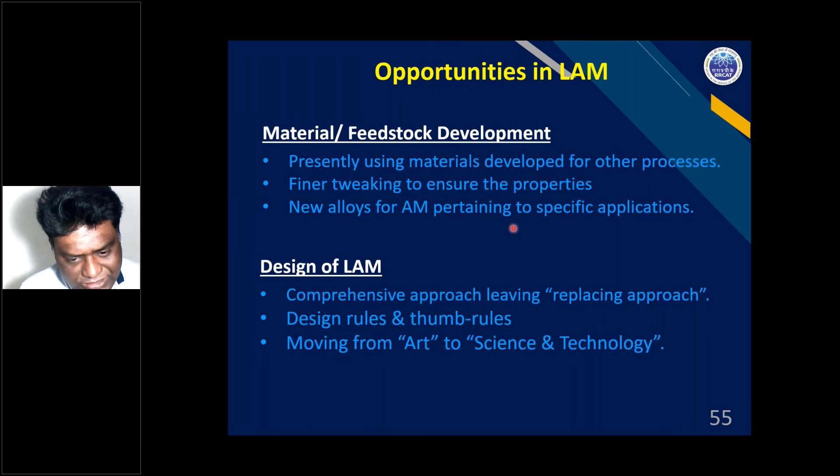People come up with better ideas, and we have to move this into a science and technology domain so that things can be done and achieved in a better way.

There's a need for modeling and simulations. A lot of effort is in analytical modeling, but the issue is analytical models cannot handle complex structures. On the other hand, numerical solutions take a long time. So the question is, can we have a hybrid approach or some new approach for immediate simulation? Can we apply some nomogram or machine learning? That is the need, and there's an opportunity for people to push things in different ways.

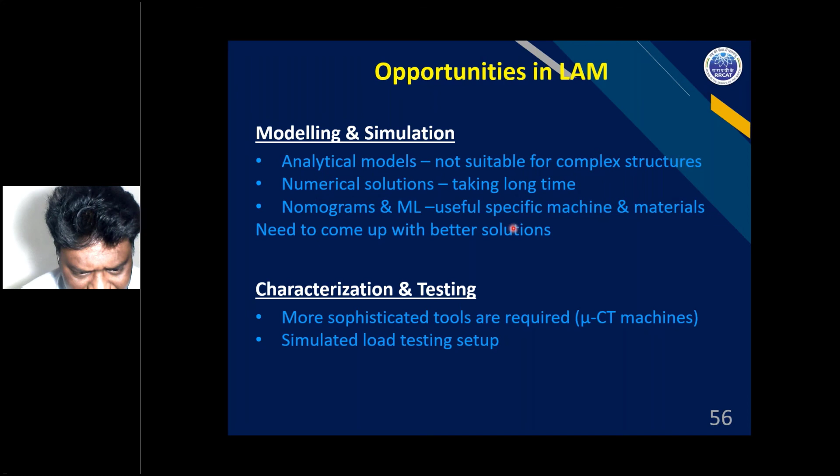There is a need for more sophisticated tools for characterization and testing. People may have to go for simulated load testing, because the material property may have a different aspect to it.

Besides this, there is a need to have a design code, same as we use for pressure vessel development - section 8, welding is section 9, reactor components is section 3. Things are very simple there in conventional manufacturing. We need opportunity to develop design codes and certifying agencies and guidelines. Since the process is new, agencies are not aware, things are not established, so there is opportunity for people to come up with ideas in these areas.

Besides all these things, whatever we learn, finally we have to imbibe into a system. We have to think of curriculum development. People are trying to do it - many things are being done by AICTE and other institutions, but a lot has to be upgraded fast because the technology is changing. There is a need for FDP - a lot of FDPs are being done in the country, and this has to continue so we can have a better approach in this action.

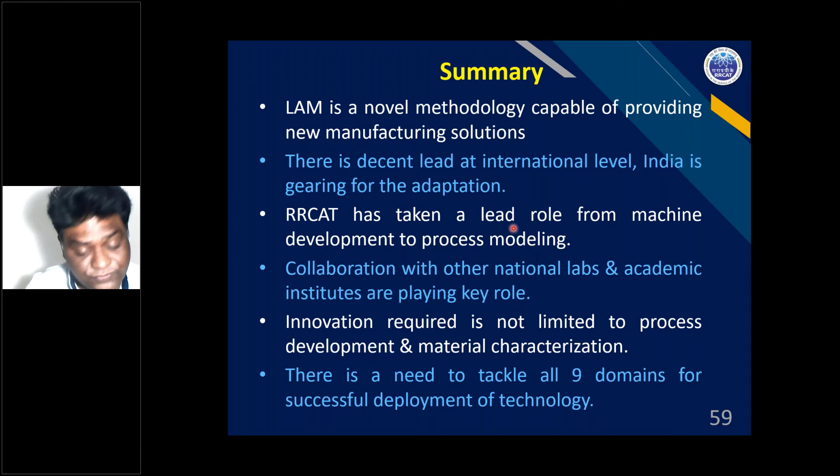So these are all opportunities for us to contribute and make things in a different way. With this, I'll go to the summary. LAM is a novel methodology capable of providing new manufacturing solutions. There is a decent lead at the international level, and India is gearing up for adaptation. RRCAT has taken a lead role in machine development and process modeling. We are collaborating with various national labs and academic institutes. More innovations are required to bring things to the next level in a better way. There is a need to tackle the 9 domains that I have specified for successful deployment of this technology. With this, I will conclude my talk.